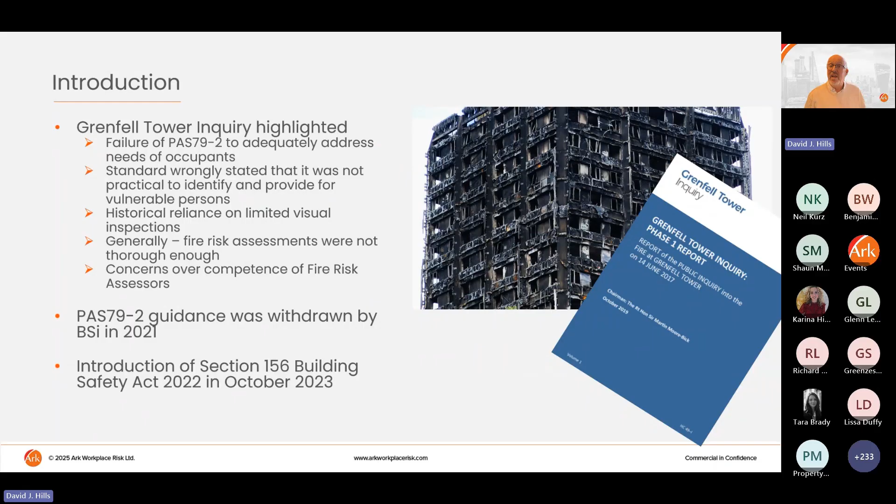So what did Section 156 actually require then that meant that there was perhaps a need for that additional review? Well, Section 156 of the Building Safety Act, I think most people believe that the Building Safety Act only applies to residential buildings. It doesn't. Section 156 actually amended the Regulatory Reform Fire Safety Order. I'm going to call that the Fire Safety Order from now on, which covers England and Wales.

And those changes actually occurred on the 1st of October 2023, and it basically affects all types of buildings and all workplaces covered by the Fire Safety Order. That is residential. That's made it very clear residential is included, but as well as commercial, retail, industrial, and any other type of workplace as well.

The overall aim of Section 156 was very, very clear. It really looked to enhance fire safety risk assessments, as well as focus on the competency side as well. The section is encouraging people to actually have more comprehensive and much more detailed fire risk assessments, and effectively requires local fire authorities to require that and insist on that, with also improved cooperation and coordination and communication between all the parties responsible for a building.

When a fire actually attacks a building, it's not just going to stay in one area. There is a likelihood that it's going to spread from one part of a building to another, especially if compartmentation has broken down. But we also have to recognize that compartmentation is only there to inhibit the spread of fire, and it's only going to do that for a set period of time. So the overall aim of Section 156, as I said, is to improve and understand the fact that there is often going to be more than one party involved within a particular building.

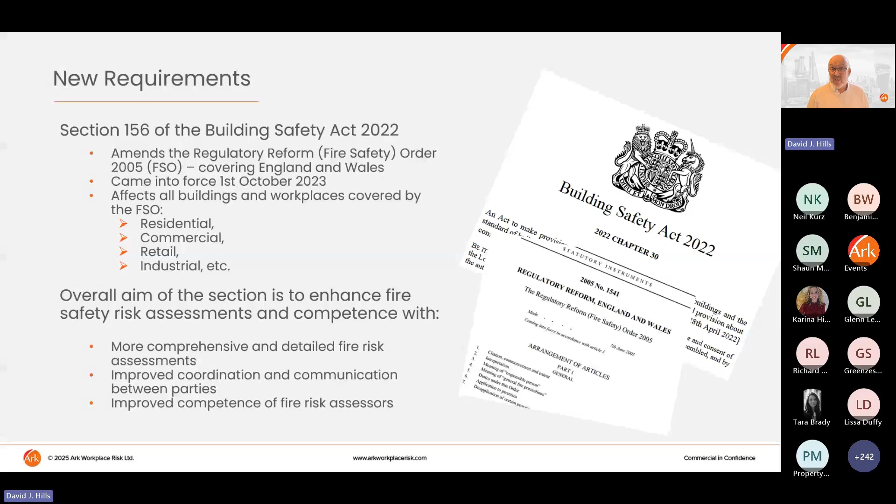Now, the Fire Safety Order itself makes it very clear and requires that a fire risk assessment undertaken for whatever building must be suitable and sufficient. Now, the big problem we have is that there is no definitive term for what suitable and sufficient actually means. And in fact, in the actual Fire Safety Order, there is no definition at all. What we have, though, is guidance that's been issued by both the HSE and the Building Safety Regulator. And in addition to that, we've got some sketchy guidance from the Chief Fire Officers Association.

And they basically have suggested that there are certain things we need to look at in order to satisfy that suitability and sufficiency test. For example, does the assessment actually have sufficient coverage? Is it a full and proper check of the whole building?

Because again, fires don't necessarily stay in one particular area. Does it provide, for example, full and detailed justification, including commentary? So the days of tick box exercise only... it's okay to have a tick box, but if you've got a tick box with no commentary and no justification on the acceptance or not of any fire safety measures that it's referring to, then that is unlikely going to be considered to be acceptable going forward.

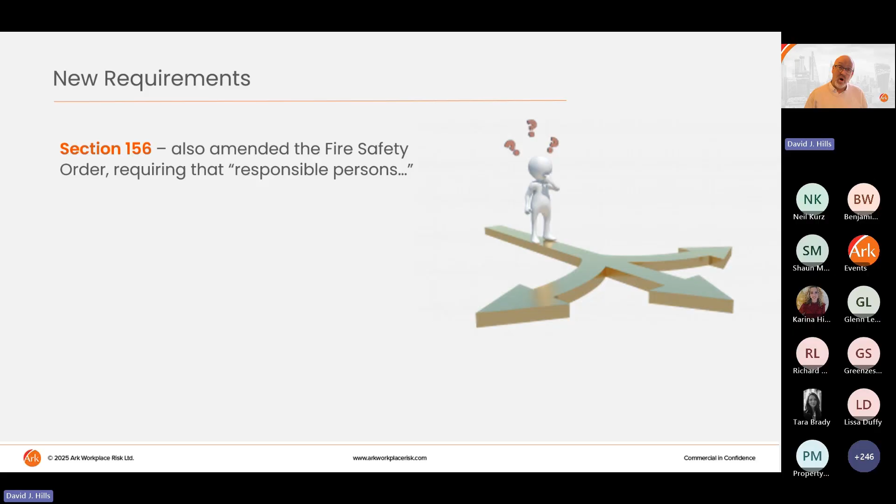In addition to that suitability and sufficiency test, Section 156 also amended the Fire Safety Order, and it requires that responsible persons, and responsible persons here we are talking about property managers, other responsible persons, for example, within the building could be commercial tenants. So commercial tenants are considered to be responsible persons. And so Section 156 requires that within your fire risk assessment, you have got to take reasonable and reasonably practicable steps to ascertain the existence of what they call responsible persons who share or have duties in respect of the same premises, as well as identifying any accountable persons under the Building Safety Act.

So we can't just look at that particular part and turn around and say, okay, well, we just got to ignore the fact that we've got a commercial operator perhaps on the ground floor. No, we've got to consider that. I think the difficulty that Section 156 gave us was the fact that we don't just have to identify the existence of that person, we've also got to identify a UK address. Now, that is causing some issues for many, but it's certainly something that needs to be considered. We need to find out where, for example, notices can be served, both in respect of private legal action and obviously legal action undertaken by the Fire and Rescue Service.

In addition, responsible persons have got to share relevant information with the incoming responsible persons. So what we mean by that is that if, for example, you are taking over an existing property from another managing agent, that managing agent now has to provide you with all of the information they have relating to that building: the previous fire risk assessments, any fire strategy, the as-built fire plans that are required in law, details of the maintenance tests that have been undertaken. All of that type of information has to be shared with the incoming responsible person. And that extends down to the commercial operators as well. So it's not just property managers that have to look at that, but commercial operators as well.

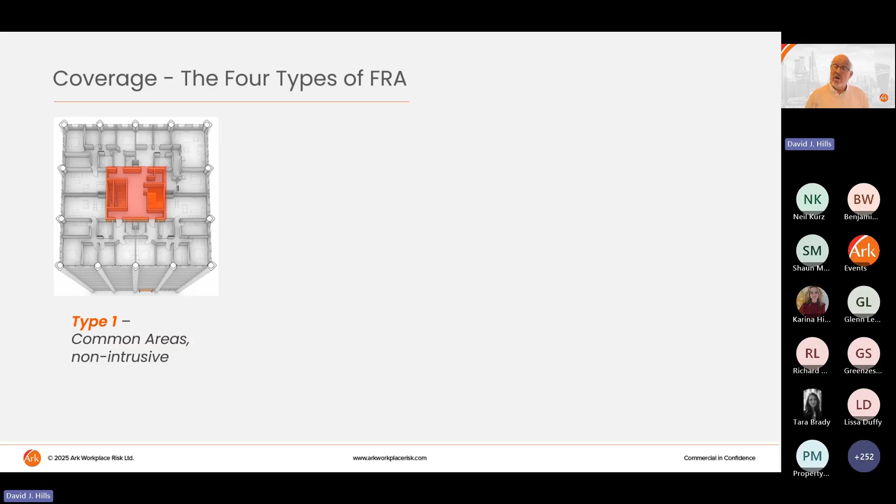But again, minimum standards. And we're already seeing, as I said, fire and rescue services effectively saying, nope, it's insufficient. We've got other areas, we've got areas of concern that need to be considered. So the other 3 types need to therefore be thought about. So a type 2 will look at the common areas only, but it'll be more intrusive. So why would someone want an intrusive survey?

Well, it could be that last year your type 1 assessment actually highlighted significant failures or flaws that could compromise, for example, fire compartmentation. That type 2 assessment is much more intrusive. It looks to consider those structural fire protection and other vulnerabilities and to confirm how well the building is doing in respect of stopping fire from both spreading and actually moving around the building or moving in those particular areas for which we are responsible.

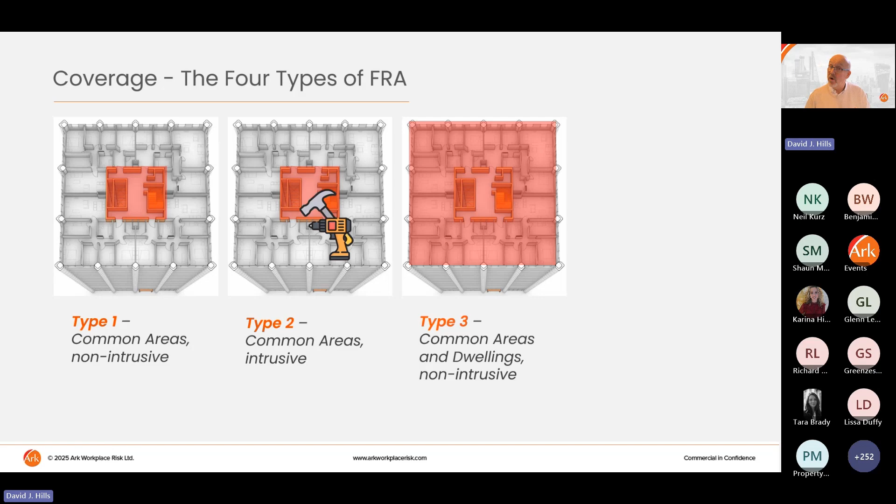Type 3 risk assessments are much deeper. They look at the common areas as well as a sample of dwellings on a non-intrusive basis. It, as I said, provides that deeper understanding of fire safety within the building. It supports justification. It will support your building safety case, for example. And it's very, very relevant for landlords who are purchasing a property and or for properties where you have vulnerable tenants.

And the final one is a type 4 fire risk assessment, which looks at common areas and a sample of dwellings, but includes some degree of intrusive and destructive survey. When would someone want this particular one? Well, when serious unaddressed fire safety defects in both common areas and or individual apartments have been identified, you would probably go for a type 4.

You would also, for example, consider a type 4 if you were particularly concerned or had suspicions about the construction history of that particular building, or where there was a high risk of fire spread and there was a need for a much deeper in-depth inspection of compartmentation and fire stopping.

So 4 levels that haven't really changed very much, some slight changes to definition, but the coverage element now is really important. We really do need to think about which one is appropriate for your particular building and for your particular circumstances. We can't just turn around and say, oh, well, I'm only responsible for the common areas of the building, so I'm only going to do a type 1.

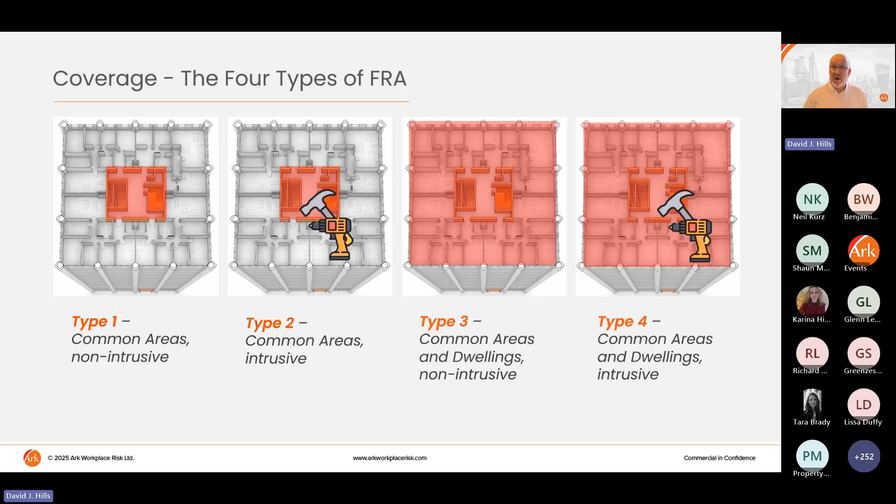If we need to consider this on a whole building basis, we need then to actually start thinking about whether it's type 2, 3 or 4 that's more appropriate. And again, justification of that needs to be included within the assessment. Justification of why you have only focused on the areas that you have has to be included within your fire risk assessment.

Now, the British Standard sets out some key principles for fire risk assessments, which weren't actually included within the previous PAS. So the first thing it talks about, and it follows from the definition of fire risk itself, is that a fire risk assessment involves consideration of all of your fire hazards and the means for their elimination and control. So what type of fire prevention measures are in place? So one of the key principles is to actually ensure that we look to the methodologies, the systems and the management arrangements that are in place to either eliminate the fire risk or to control it adequately.

And it sets out some key areas in respect of a hierarchy of control. One of the principles that it talks about as well is that the objective of fire risk assessment cannot be limited merely to preventing harm to the people within that building as a result of a particular hazard.

But it also then talks about looking at what endeavours are being made to eliminate or reduce the hazards themselves. So it's not just about the people, it's about what we are doing in order to, again, eliminate or reduce fire risk on a basic basis. And it's really then about how we can also reduce the likelihood of fire. So it's also about fire prevention. So we will be looking at management arrangements.

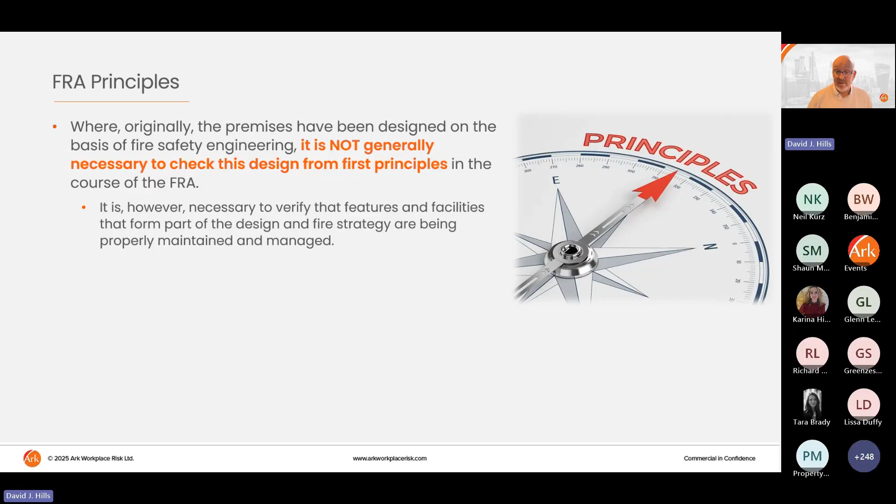Is it properly maintained? In addition, the guidance is very clear that fire risk assessors should not be undertaking intrusive investigations in respect of structural fire precautions or structural fire protection. So they're not expecting people to open up the structure and remove sections of ceilings. There are other methods of intrusivity in respect of the type 2 and type 4 assessments that need to be considered. So structural fire protection, the protection around the beams and the columns, is going to have to be accepted following construction unless there is evidence to prove that there are problems.

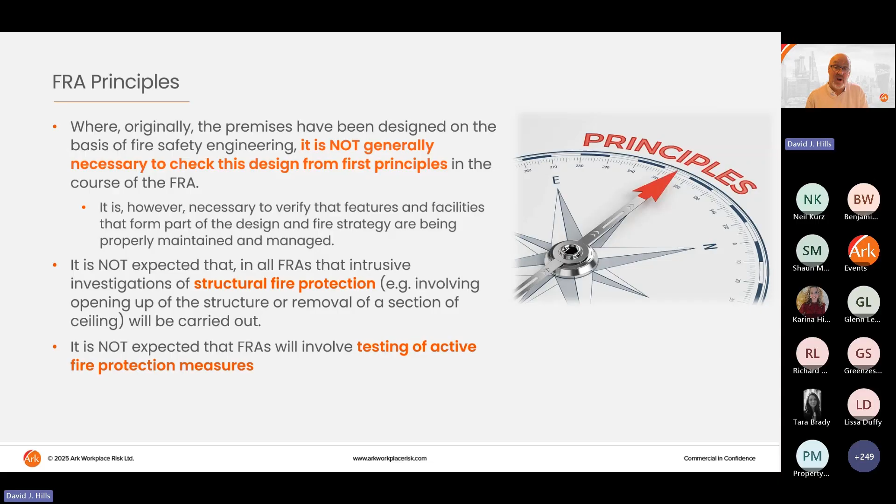It's also expected that fire risk assessors will not be testing the active systems. We will not be setting off fire alarms or testing smoke extraction systems. And finally, the final principle contained within the code is that every fire risk assessment must include a thorough consideration of the fire safety management arrangements that are in place. So they are the key principles.

So British Standard 9792, as I said, is a detailed document. There's some significant guidance in there in respect of all of this, but those key principles are very, very important. Don't expect your fire risk assessor to be testing your fire alarm system. Don't expect your fire risk assessor to be testing and checking the calculations from a fire strategy, but they do need a copy of the fire strategy if there is one in place.

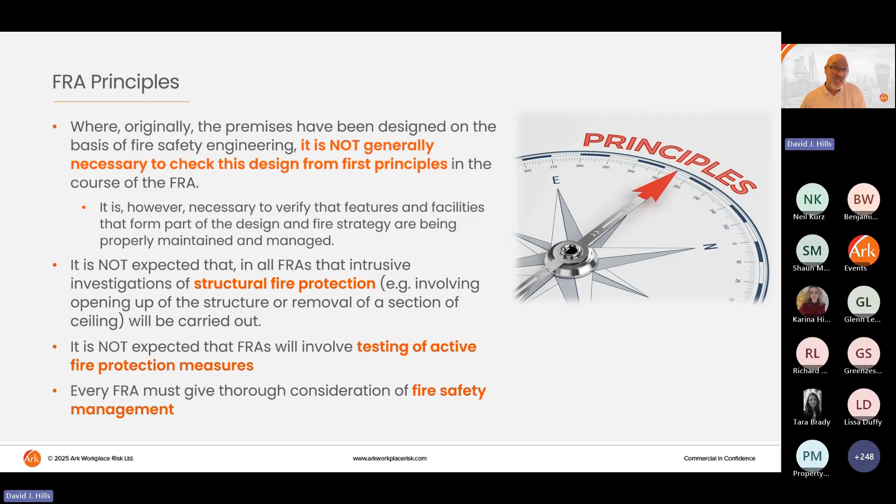So what is the new 9-step approach that the code sets out? I'm not going to spend too much time on this, but the first thing we've got to do is obtain relevant information. So there is going to be a need for a document trawl. What information is held in respect of the fire safety arrangements within that particular building? It will then be upon the assessor to identify what fire hazards are in place and determine the existing measures of control. What systems do we already have in place? What inspections are being undertaken? What measures do we have in place to manage fire safety?

And from that, make that initial subjective assessment of the likelihood of a fire materializing, and we've got to base that upon step 1 and step 2. We've then got to look at the physical fire protection measures that are in place and determine your fire safety management arrangements, what documentation and evidence is available. And again, then make that subjective assessment of the consequences of fire, based on step 1, step 4, and step 5.

What we then do is take step 3 and step 6 and combine them for a final assessment of risk. If, though, there are new controls needed or controls need to be amended, then you have got to develop a prioritized management action plan to address all of the shortcomings and reduce the risk.

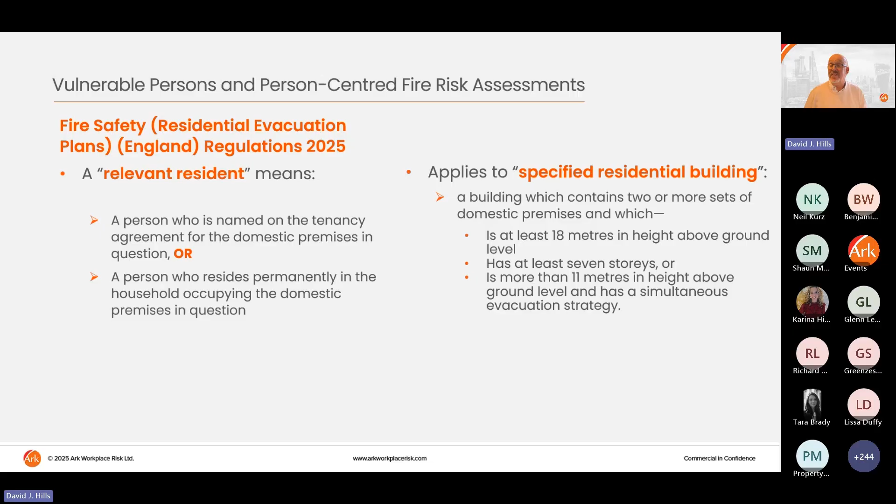And obviously it applies to any type of building that's 18 meters or 7 stories above, as well as any building that is 11 meters or above that has a simultaneous evacuation strategy. And effectively, the definition within BS 9792 of vulnerabilities is based around all of these definitions. It's not just the mobility impaired. We could, for example, be morbidly obese, sensory and neurological issues. In addition to that, temporary impairment as well, and pregnancy is also included as a vulnerable person.

And so the approach within that means that we've got to start looking at the process within a person's home. So we have to look at the very specific fire hazards in their home and identify specific arrangements, as well as areas outside of that, the means of escape arrangements as well. And we've got to identify why a person is actually undertaking it.

And actually, it can be called in from many different sources, whether it's the residents themselves, it could be carers who are acting on their behalf, it could be family members who ask you to undertake it, or you as a landlord or as an agency just feel that it's actually appropriate, and as part of your engagement process, you've identified that a particular person is a vulnerable person.

And effectively, you've got to assess the fire safety risks, again, inside the residents' domestic premises themselves, assess the fire safety risks within the common parts, and consider the residents' ability to evacuate the building in the event of a fire. I think the important part as well is that we've got to ensure that the outcomes of any person-centered fire risk assessment are considered alongside all of the other arrangements within your normal fire risk assessment.

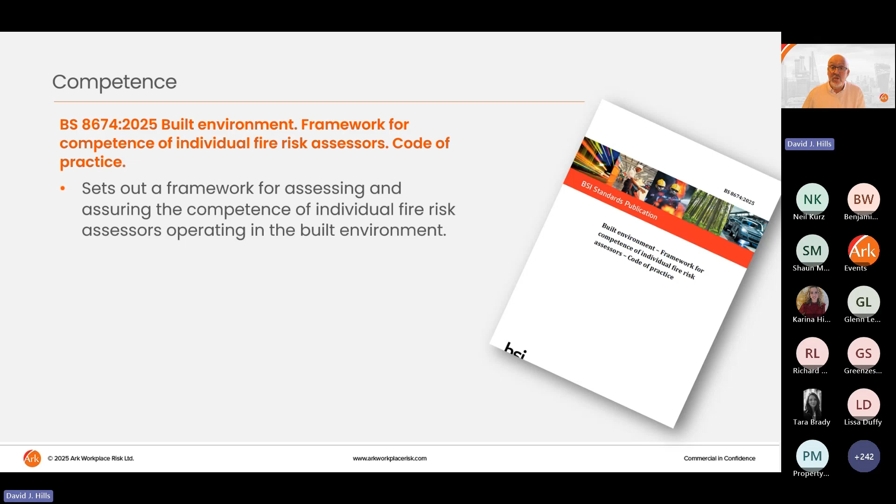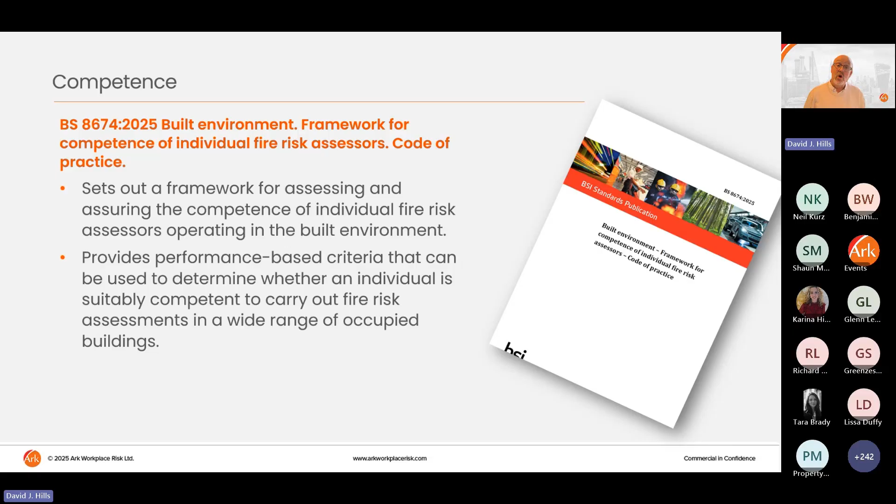So one of the areas that we would strongly recommend is that you should be asking, not only is your new risk assessment to BS 9792, but are the actual assessors competent to deliver that particular part? And what the code does, it provides, again, that framework for non-invasive fire risk assessments. It provides guidance on what records and historical documentation they should be looking at. And very importantly, it sets out a 3-tier approach to assessing someone's competence.

So if we're talking about foundation, for example, they are able to undertake simple, low-risk buildings with minimal occupancy. If they are intermediately assessed, then they're suitable for buildings of moderate complexity and broader usage types. And then the more advanced assessor would be intended for high-risk buildings, complex environments such as very large residential blocks, care facilities, and public entertainment venues.

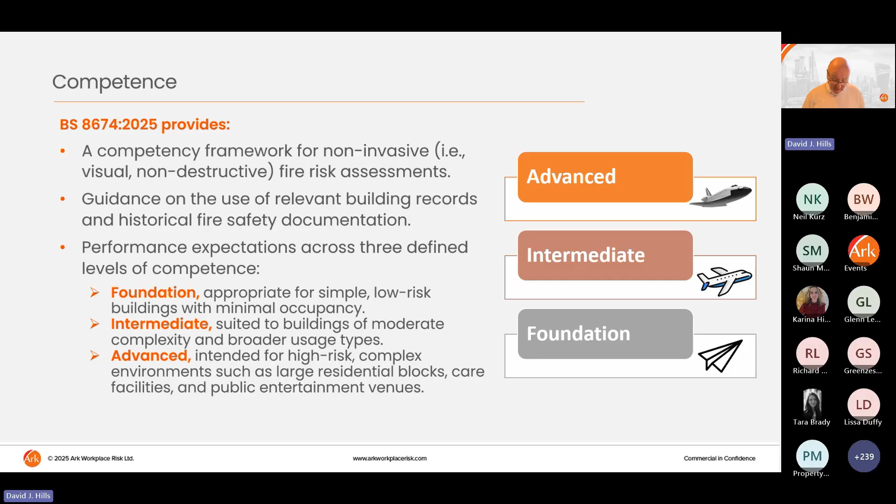So I just really want to finish by looking at the practical implications for property managers. One of the things that we would strongly recommend is make sure that your assessors are using BS 9792. Make sure that you've selected the right coverage. Is your building a high-risk building? Has it a history of compartmentation or other issues? If it is, perhaps type 1 is not the right approach. But be prepared that if you do go down the type 1 approach, then that may get called into question by either the regulator or the fire and rescue service.

You should verify your fire risk assessor's competence. You should be looking as well at the organisation. Does the organisation have what we call organisational capability to manage competence? We would strongly recommend that you plan for April 2026. Set up a programme now for person-centred fire risk assessments. Ask your residents about their needs and requirements as part of your resident engagement if you're a high-risk building.

But if your building is 11 metres or above, then again, we strongly recommend that you ask residents about their needs and requirements. Make sure that you support the fire risk assessor by having available that golden thread of information. And make sure that if you receive a fire risk assessment that tells you that you've got actions to undertake, that you systematically prioritize those and complete those remedial works and actions promptly.

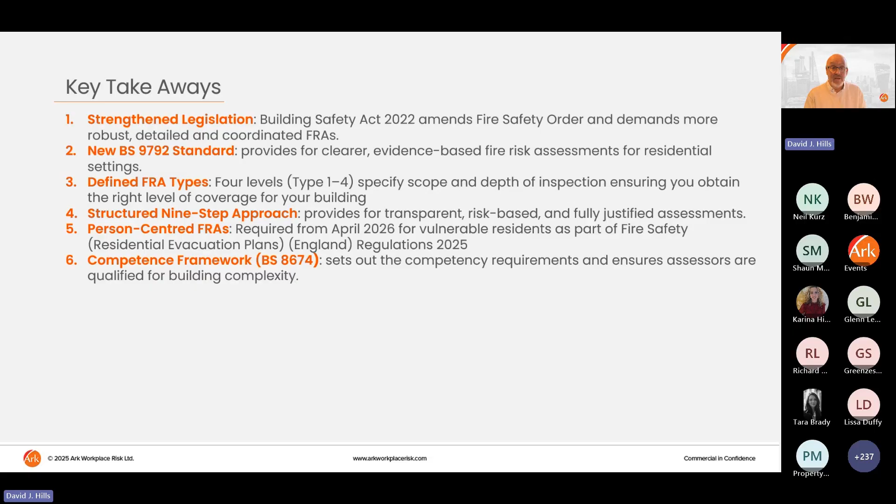We've got to think about person-centred fire risk assessments. April 2026 will come around pretty soon, so we would strongly recommend that you plan for it now. And again, competence-wise, that new competency framework, BS 8674, sets out the new requirements. It ensures that you get the right assessor to deliver the right quality and that they've got the right skills, the knowledge, the experience and the behaviours to deliver the right assessment for your building. We would strongly recommend that we start looking at resident communication.

We've got to start thinking about how we share fire safety information and fire risk assessment summaries to residents, what type of language is used, and also look at the practical actions about what you need to do. Get a system in place now. Start working on it now. As I said, April, in respect of person-centered FRAs, it will come around very soon.

But actually, you need to ask yourself some very simple questions. Based on the new law, based on the new code, would you be happy to stand up in front of a judge or, hopefully never, a coroner and turn around and say, look, I believe my risk assessment is suitable and sufficient? Does it provide the level of protection that you need as managers and owners? If not, we would strongly recommend that you review and don't delay. Hopefully we've got some time for some questions, so back over to you, Tara.